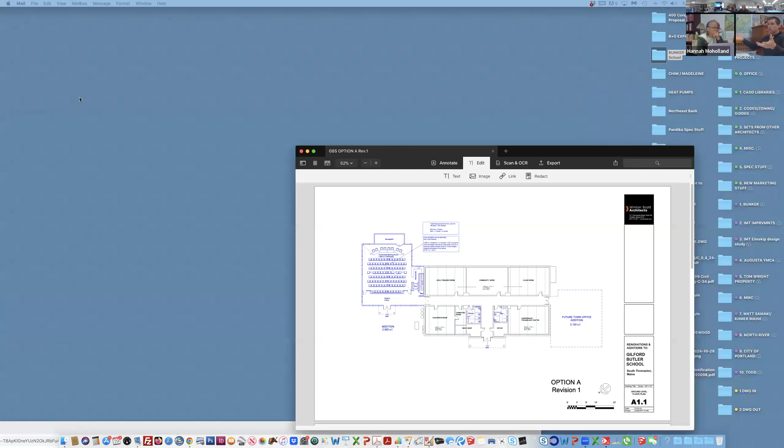Yeah, maybe if I could just frame it for us. So we, as a committee, our job is to try to figure out the best option and plan to move forward here. And then at some point we're gonna pull all our work together and take it public, not to sell it to people, but to show them, advocate for why we think it's the best line of thinking, build public support for it, and assuming that is successful we would then fundraise and try to pull it off. So we're at the beginning, not quite at the end of the beginning, and what this has really devolved into in the past 2 meetings is a choice between putting the addition on the left-hand side of the building or the right-hand side.

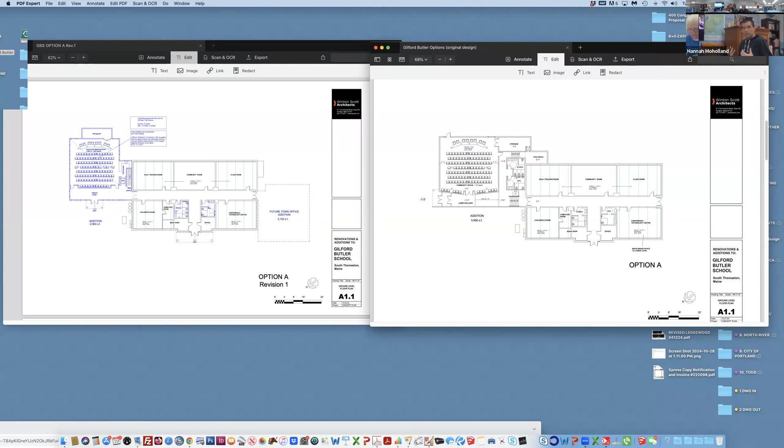And I think the 2 options are close enough that splitting hairs is probably not the right word, but it's viable on both ends. It comes down to one option maybe being a little less expensive, but not orders of magnitude less, and one option might be a little better for planning purposes and overall flow of the site, but not a lot better. So we have to come to some consensus on which one that's gonna be and why, and I think there's some things for us to talk about.

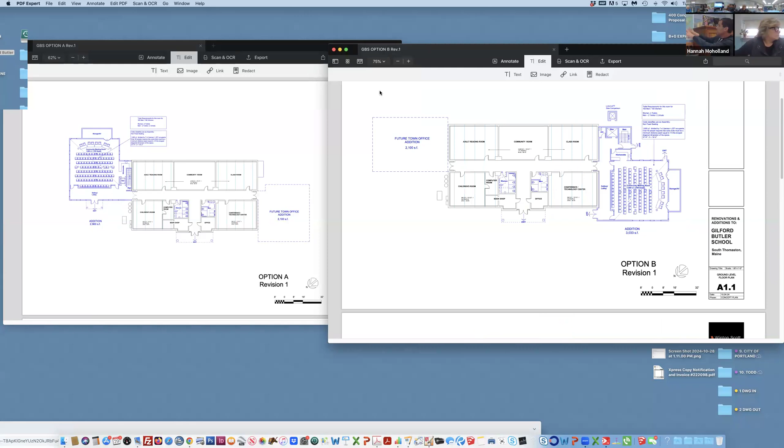So I think that's how to frame the discussion once we've let Steve present the options he's pulled together based on the feedback he received from the group at the last meeting. I think a good way to proceed would be to let him show us what he's done. And before we try to fix what he's done in committee, let's understand what he's done and make sure everyone has the same common understanding of the relative merits of what he's saying. Then let's talk about the 2 schemes and try to ascertain if we think we have enough information to really move forward on one or the other.

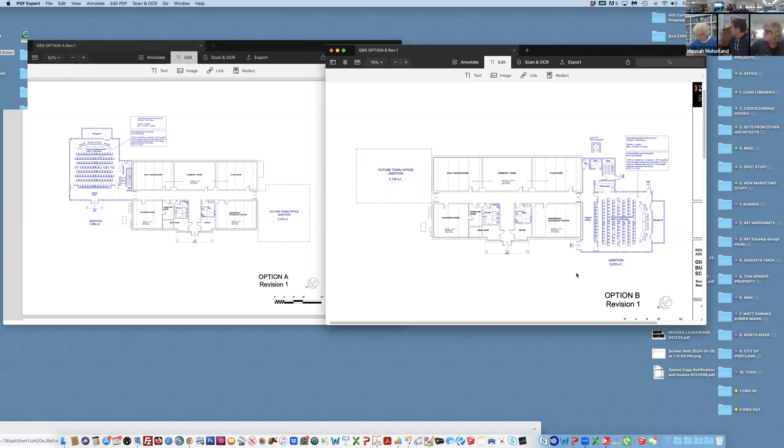We've had a little bit of engagement from our civil engineer, not really as much as I would like, but we've had a little bit. We're certainly gonna need more as we move forward, but we've primarily had Steve as a resource for now. So Steve, I guess at this point I'd like to turn it over to you and let you walk us through these changes.

Sure. Is everybody hearing me okay? Yes, okay, yeah.

So I guess just a couple of pre-comments to introduce the 2 options relative to the discussion from our last meeting. There were a couple things to point out. I think one of the things most everyone agreed on was that there was room to make both of the options more space efficient and kind of trim them down, relook at some of the circulation, and really try to simplify as much as possible to get that square footage of the additions down.

So a couple of big moves I made in this revision, to that end: the big one is in looking at the bathrooms for the new addition. We had a little bit of a discussion about the code requirements. When you have a big meeting room, you have to have a certain number of toilets to serve that, as well as the library. I had initially been showing the entire needed bathroom count in the new addition, and as we went through the meeting last time we said, if we open up the library, why can't we use the library bathrooms to augment the community room bathrooms to save some space? So that's what I started to look at.

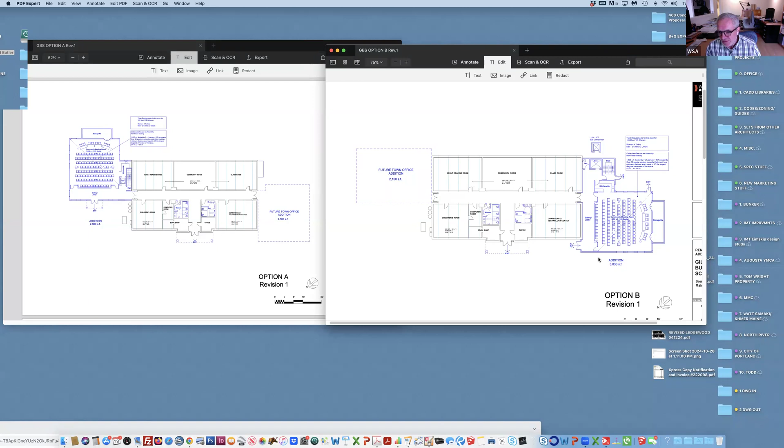One other thing I forgot to point out, in trying to reduce things, I did drop the seating size of both schemes in the meeting room. Originally I had 119 seats, so I took 10 seats out to bring it down to 109.

So that's that. Let me quickly run through the lower levels, which for now are pretty much the same in both options. In the schemes last time, I had not really addressed the existing big mechanical slash storage room, which I guess was the former fire barn. I'd heard that you still had some need for pretty significant big item storage, and the fact that it was down at a floor level sunk another 2 feet below the rest of the lower level creates another accessibility issue. I had kind of thought initially that maybe that just stays the way it is.

But I think I got pushed on that a little bit — John was saying last time that it's a very usable space with those big openings and potential for daylight access. So let's really look at what could be done there. In these new schemes, I do show that existing space being reused. I'm calling it an exercise studio, but it could be whatever.

Showing the necessary ramp, which would be a 24-foot long ramp plus a 5-foot landing on one side of the space to get you down into the building. And because of the way it's situated at one end of the building and its access to potential fire exits, this room would need 2 exits directly serving that room based on its size.

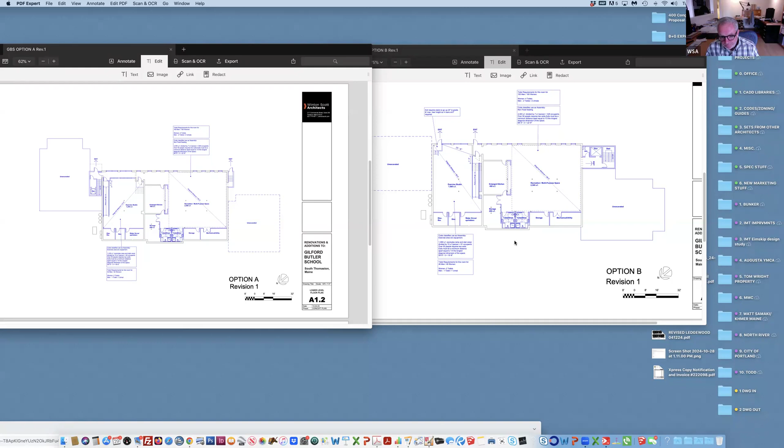So those are the buildings themselves, and I'll just touch quickly on the site plans for the two of them. I'm hoping this is big enough for people to see, but side by side.

Starting with option A now, because I made the mental leap of saying just go with an elevator, it's no longer situated halfway between the two floor levels. Instead, it's sited level with the main floor of the library. And what that means on that side of the site, with all the falling grade, is that you have to enter that addition on the front.

I have a little red—those red triangles represent the different entry points into the building. And it's going to probably require some retaining walls and grading issues there to get both regular access and accessible access, which would really have to come off the circular drive area, because that's kind of the plateau flat area of the site. Still allows for the lower entry into the lower level around back.

At this point, I basically made the parking of the two schemes the same. The idea is just as a planning exercise to say we might be able to improve on that a little bit here and there, or do it a little differently with Will's input, but basically it's 45 spaces comfortably on the site. And if you decide you only want to build 20 of those and have an overflow area that's gravel or grass, or decide to make that connection to sharing with the church, this should really just be seen as one option — if you were trying to max out parking, this is probably about as good as we're going to do and still have it be comfortable.

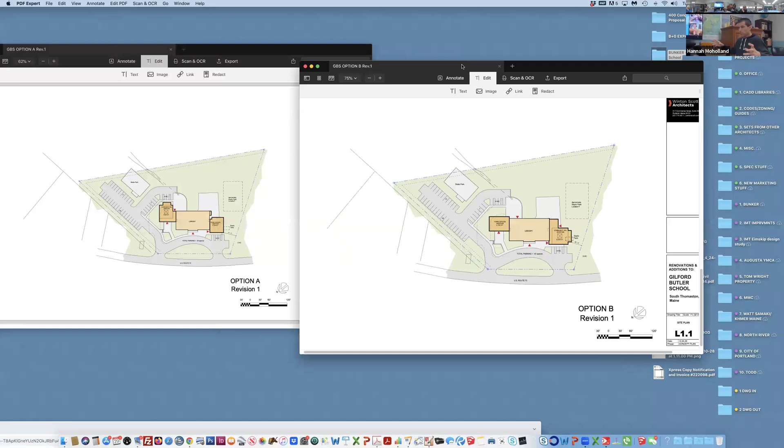Okay, thanks, Steve. I think what makes sense is for us to ask Steve any clarifying questions first about the schemes, and then get into discussing the merits and comments on them. One thing I'd like to reiterate from the beginning of the meeting regarding the town offices: I don't want us to get bogged down, because we're at the design phase where there are almost too many factors in play, and it can look like the mission is going in different directions. That's natural and okay.

But we also need to get back to our original charge. We had a clarifying email exchange with the town and John, who's here, about what exactly our mission should be with respect to the town offices. What we clarified and decided was that we weren't designing them now, weren't necessarily even planning for them now, but we were asked to consider what if someday the town offices might want to move there, and to try not to make a move here that would foreclose that. I think what I've gotten out of this discussion is that nothing we're considering forecloses that out.

It would just be tacking it on the other end anyway, most likely. So I think we can almost dispense with that part of it and not get too hung up on it. It's fair game for discussion and comment, but I don't think it's a driver of what we're supposed to be doing as a committee. So with that one caveat, I'd like to turn it over to the committee for clarifying questions to Steve, maybe first on Zoom and then here in person, and then we can go into a discussion.

Anything from Zoom for clarifying questions for Steve, from Michael, John, or Candace?

To me, it's very clear what he has explained, and thank you very much for taking the time to make it that easy to understand. I have a couple of questions that I think are off topic for that, so I will table my concerns until later. Thank you.

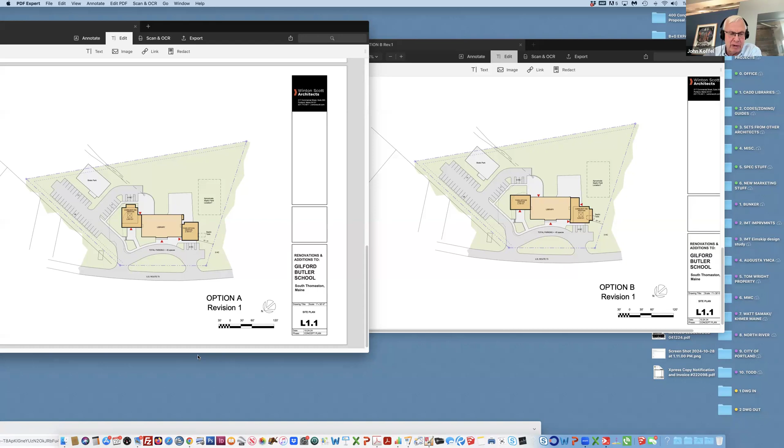Using the bathrooms was a brilliant idea. It saved a lot of space and kept everything on one floor. And I agree with Kevin that our mission is the community center. There are good options for the town offices.

I do think there is a cost factor for the addition in the A position related to its elevation. It's being set. Right now we're doing questions, and then we're going to talk about all that. It's a comment about the placement and its cost. John, we're trying to do questions now so we can all get to a common understanding, and then we're all going to comment on it after we ask the questions we need to ask.

My question then is, what is the cost difference between the two, A and B plans? Okay, thank you.

If you're looking for me to answer, I don't know. All I can say is I agree with you in the sense that, gut feeling, obviously the A positioning is going to be more involved with grade, but we're going to have to dive into it a little more, hopefully with Will's guidance, to get that dialed in more cost-wise.

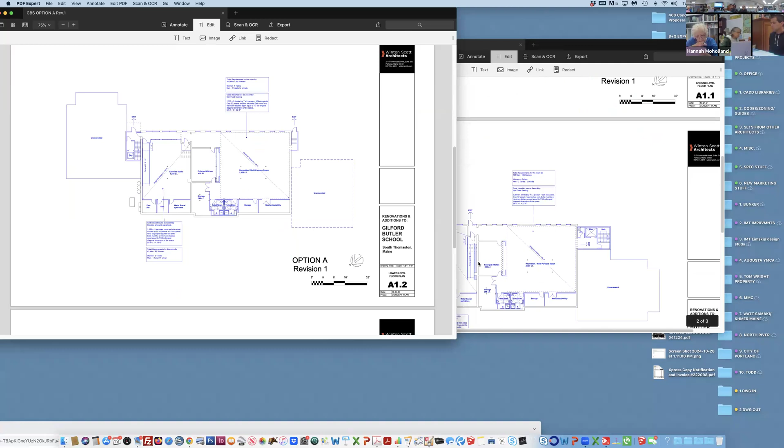But the idea was that it was all unexcavated. That said, there's probably an opportunity to capture that space if you wanted to, for utilitarian storage, but that is going to increase construction costs further to have more usable space. Any other questions? Well, I'm worried about the storage available in the building on the lower level. That's reduced significantly, so that's why I wanted to ask about option A.

Okay, but other clarifying questions? Could that addition on A be put on pilings of some sort, so it's more open, so that it could be used for storage? You can do anything with money. Well, that'd be more expensive to do it? Yes.

And so it's a question of—I think something like that is probably one of the second order questions, maybe not quite a first order question. It's important, but it's not as important as getting something that's feasible that we all have buy-in on.

Okay, my other question is, on option A or B, either one, the recreation room is 2,300 square feet, and our addition is 29—I don't have the other one right in front of me—just over 3,000. Could we somehow juggle the downstairs so that we have that same square footage without putting an addition on?

That's been an idea that crops up every once in a while. That's the cost-conscious, good old Maine thing to do. But my take on the whole thing is that it has never quite captured the energy of anyone, as if that's an okay place to have the town meeting, even if we can make it up to code, which has been some talk about.

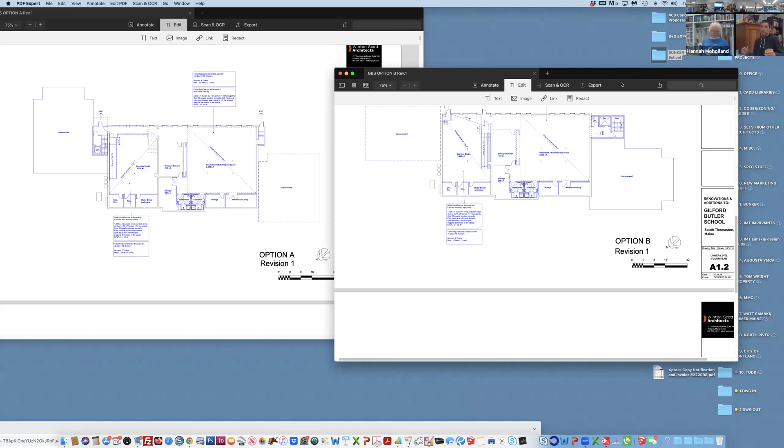I just haven't felt that there's been support for that being the cheapest way to get a town meeting on the site, of all the options we've talked about. I don't think anybody really likes it. Well, I don't know that I do either, but I'm just asking the question. Yeah, I mean, it's a good point, but it doesn't seem to have captured the imagination of the powers that be, and whoever they are. Right.

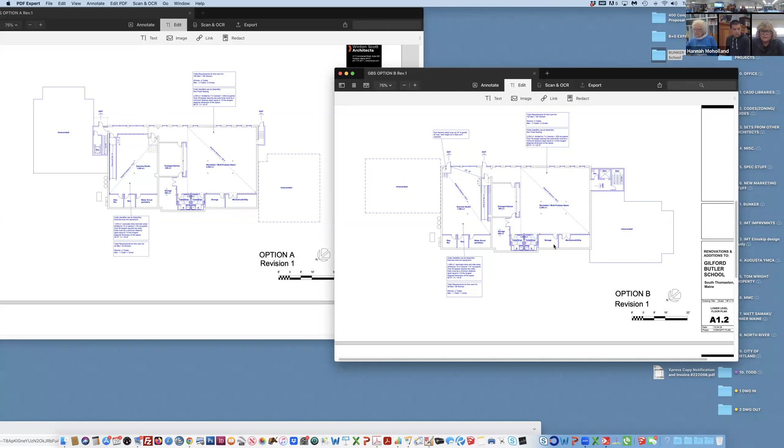I don't know if this is a question, but I think we seem to be straying away from the town's vote, which was to save the building. The addition is great, maybe down the road, but as of right now, we don't have any money.

Can we go in steps and stages to figure out what it's going to cost to save this building structurally? Part of it is, you're right, in terms of construction phasing and money raising, you're probably going in that direction. But in our design and decision process, we're coming to that solution a little bit backwards.

If you look at Steve's scope of services, it includes an evaluation of the existing building in terms of insulation, roof, mechanicals, and other things he's going to look at. We haven't even talked about that yet because we've been hung up on which end the addition might go on. Once we get that roughed out, the next thing will be, okay Steve, can you do that other stuff? Whether or not, and in what order, money is raised for which things is a whole different topic, but we're definitely going to look at the whole thing.

So we're looking at how long, a couple of years, three years? To do what? To do anything without raising the money. If we have to raise the money first, and if we go in stages, most places like to have their money up front.

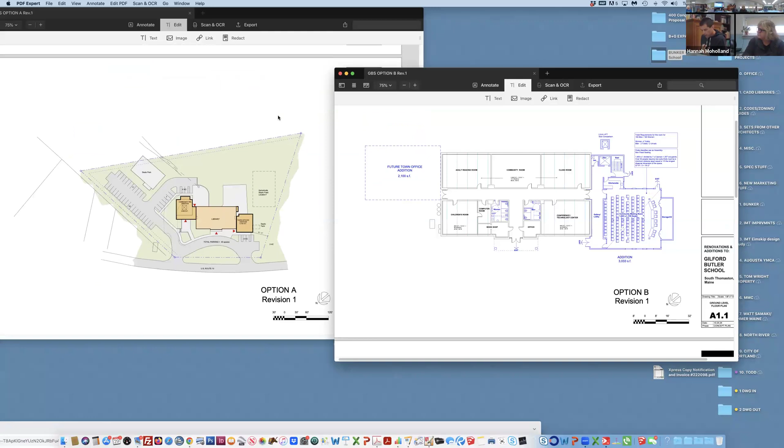I've got just one, Steve. On option A, I know there's a power pole out there and looks like a generator maybe, but is there any reason option A is set as far back as it is? Because the grade does fall away toward the rear of the site. If option A were pulled forward, I think a lot of the grade difference, or a good chunk of it, might go away. Do you have other constraints there, other than maybe the drive aisle, that cause you to push it so far back?

Yeah, I think you're absolutely right. The main reason I pushed it back was to avoid relocating the generator, the electrical service, the tanks, all that stuff there. It's not ideal to have it in the front of the building anyway, but I was trying to be cost conscious, and also trying to keep circulation simple. It seems like the new circulation wants to tie in as directly as possible to the existing corridor, so the meeting room has to go either on the back side of that or the front side.

It might be worth trying that, or even having a little jog to try to get the meeting room toward the front, to see if that would avoid some of that drop off.

I think for planning purposes, we kind of have what we need for the rough cut here. So I was just curious. Yeah.

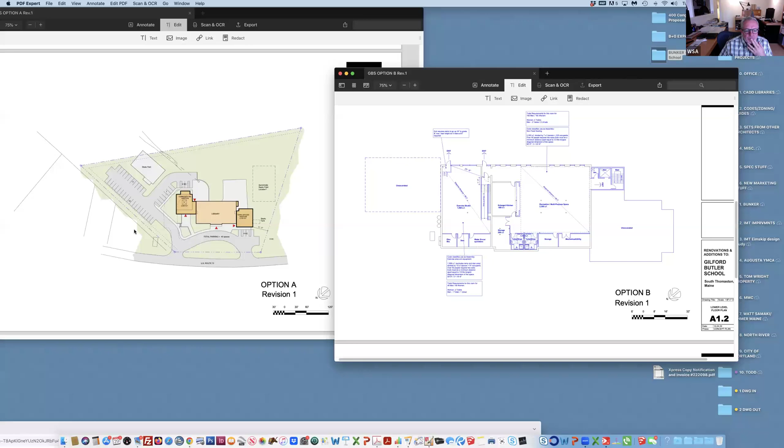Okay, if those are the questions, now I think it makes sense to start the part we've all been waiting for, which is the debate. Tear it apart.

So I don't know, would we like to start on Zoom again, or how would we like to do this? I'd like to hear a little bit from everyone, but I know there are some opinions out there. Candace, do you want to go first? Sure.

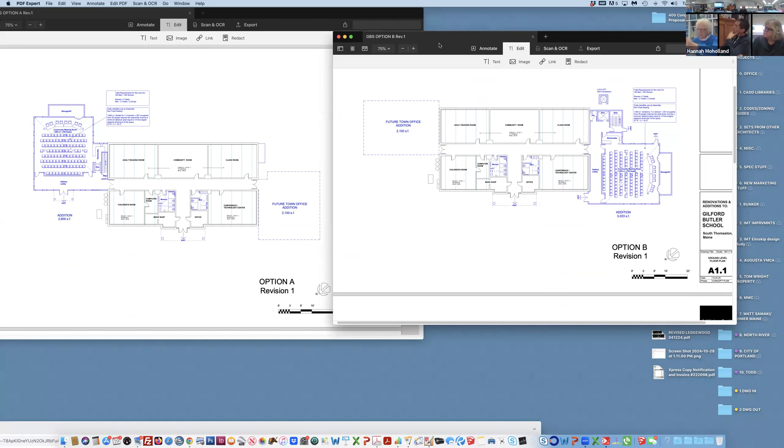I feel a bit remiss in the fact that for some reason or other, I did not realize that we were entertaining an addition to the existing building. I thought we were going to try to be as succinct as possible in using the building. So after your statement about people saying they were uncomfortable in the lower level with the meeting hall, I understand that now. So I guess that's the main thrust there. Is that correct?

Yes. Okay. And so then I'm going to move on to something else, and don't throw anything at me. I'm glad I'm over here. What if we considered having the addition where the meeting room was on level with the library, and then the underneath space would be made eventually into town hall space?

So, yeah, I can answer that pretty quickly, I think. One of the things that I wrote in my email, if you all saw it, was I did a little narrative on the existing basement, saying that when you have a space like that that's half embedded in the ground and you've only got natural light on one side, it's still quite workable and usable space for big, large things like a big multi-purpose room or a big exercise room or whatever. But to try to take space like that and turn it into something much more partitioned, like an office building that has individual offices and conference rooms and a reception area, when it gets that chopped up, those rooms that fall to one side are going to lose the natural light, and you're going to end up with rooms with no windows.

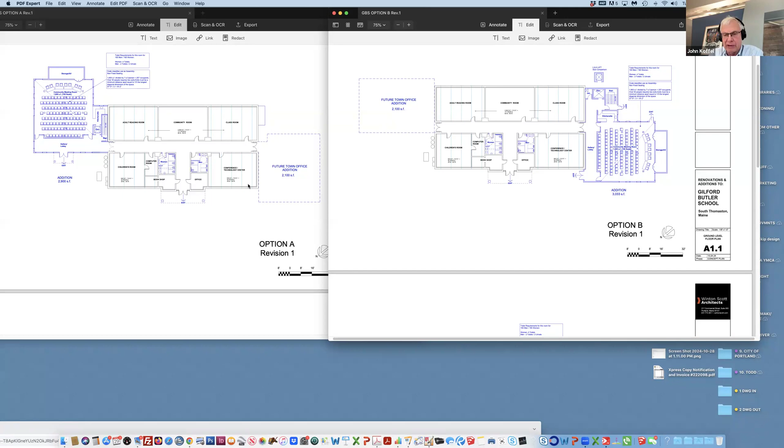In both of these schemes, the kitchen is in the basement, and without an elevator, that is an ADA violation as far as I can tell. You cannot be serving food in the community room without access. If we have budget constraints, we should go with option B, because it appears to have a lower cost, which could help cover the elevator cost and give us dual access to the kitchen. Otherwise, we're adding a kitchen to the meeting room addition.

Steve, do you think we need ADA to use the kitchen? Do we think we need ADA inside the building to use the kitchen legally? I'm not following that, because it's a logistics issue of being able to shuttle food up there, but I don't see why you need an accessible connection between the space you're serving and the kitchen, because the public isn't going to the kitchen—it's a work area.

A lot of helpful programs for disabled people involve food preparation and work in a kitchen, washing dishes, whatever—that's absolutely an ADA requirement. Access to the kitchen would be accessible because employees could go to the back entrance and work in the kitchen at the lower level. It's just that they can't deliver food up to the meeting room. But there's no actual program—we're not hiring handicapped people to run the kitchen. That doesn't exist.

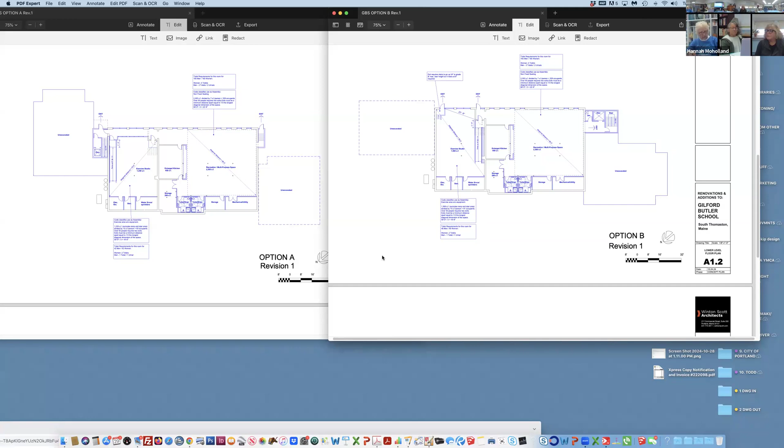I see that happening in the larger area. Yes, that was going to be my question. It would require quite a space for exercise, for 25 people, and that grows all the time.

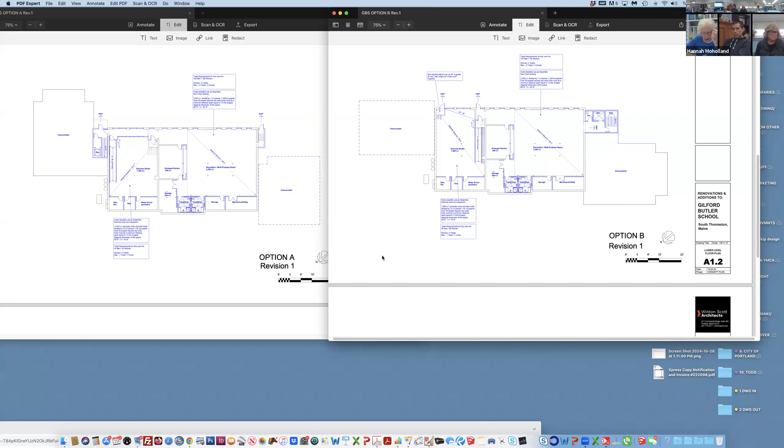And Steve had briefly mentioned that the exercise studio could possibly be divided. What does a typical exercise room in a public facility look like, how big is it usually?

It totally depends on your market and how many people you're trying to serve. You can have 7 treadmills or 2, equipment and all that. Which I don't think we're going to do — this is a small town, we're probably not going to have 7 treadmills, but no.

And that's on the bottom floor, right? You're talking about the studio, okay. So the bottom floor doesn't change in either option A or B, it's not really more. So what should we focus on to make a decision?

Well, to me, the things I've heard are that option B is probably a little less money, and option B leaves a little more flexibility to the far left space in terms of future options, because you're not tacking a building on the end of it.

Which is the point two people have made. Option A, I think, gives you a little bit better access to the parking lot. And it gives Penny better programming circulation, from the perspective of 'I'm the one who's going to be stuck running this thing' type of argument.

So those are the things that have risen up that are sort of irrefutable on each side, I think, that aren't a question of opinion. They seem to be fact for us.

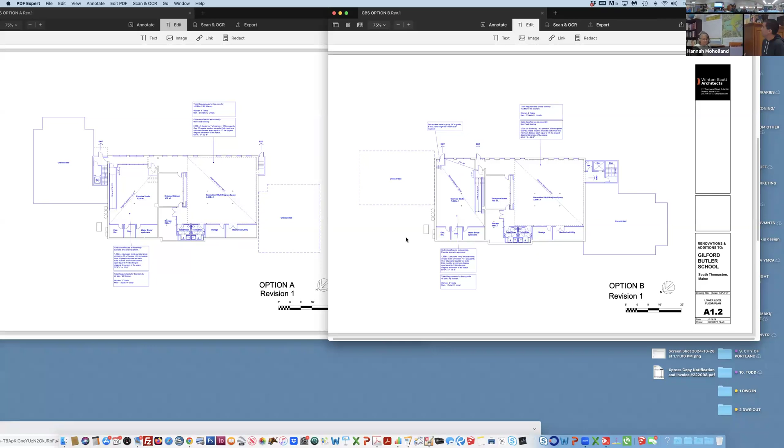Okay, so I'm going with A then. Oh, I changed my mind. Okay. I think we're making good progress because I think that's 2 A's and 2 B's, so. My report card is good, huh? John, go ahead.

What I'd like to comment is that we're focusing on the building, but we also need to focus on the building's relationship to the site, to the playground, to the children, to the exterior. Yes, we're designing a building, but it's in a setting. On that basis, I will say option B presents better potential for having windows and visibility to the playground, and even a patio in that alcove Steve has already designed. So you could have bigger walkout doors, overhead door, walking out to the playground.

So people had weddings, a memorial service, it was a good summer day. You can incorporate the outside more easily at that location. So that's my reason for voting for B, in addition to the fact that it's cheaper.

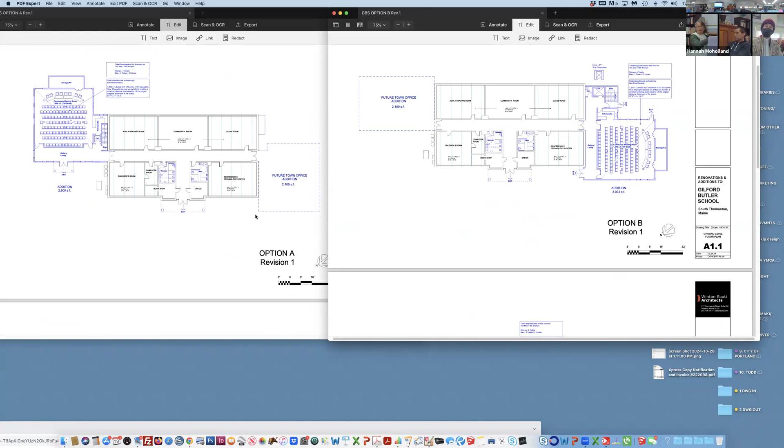I like it, that's where I am too. I'm intuitively, as I look at the site and break it down, I feel like it wants to be there. But I also, I'm not a resident, and I'm trying to facilitate rather than sort of drive it my way. So I'm trying to be persuadable and kind of go with what the group wants to do. All right, I'll go to A.

A woman has the right to change her mind. How many times? Follow the bouncing ball, right?

Maybe we should do a show of hands instead of- I'll leave that up to the chair. Just to hear, since we've been coming to the meetings, just to hear our viewpoint. Think it's fair to go. Sure, go ahead.

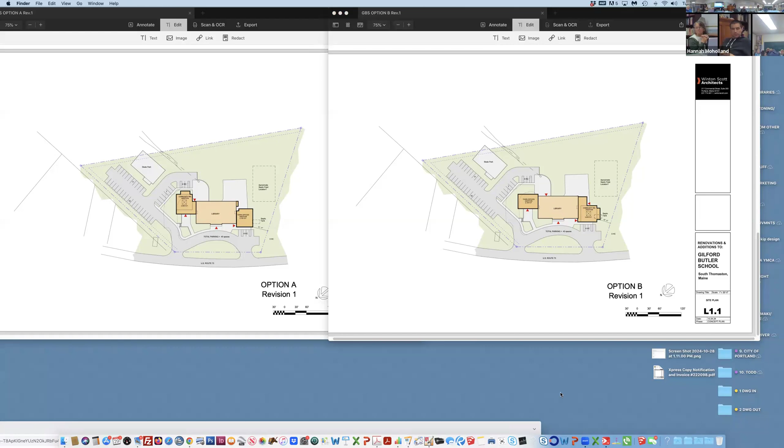Well, I like A because artistically the building would... I think somebody mentioned in the last meeting it could be a sausage. If you just add it on to the right-hand side, it just becomes a long building. I think just putting the other room off to the right makes it a nice building and surroundings.

The other thing I'm interested in, and hasn't been mentioned, is light into whichever addition you go with, A or B. And I haven't heard anything about that.

My suggestion for the storage is just make the whole basement storage and be done with it, and make sure that Penny has everything she needs down there. But then you're talking about creating a full kitchen. I guess the question is, how big of a kitchen do you need? That's a big kitchen down there, but I like the idea that you have a flow from the addition, the meeting room that can be other things, onto the same area as the center here.

And I understand there's expense with excavation, but when you visually look at the building, A is much nicer.

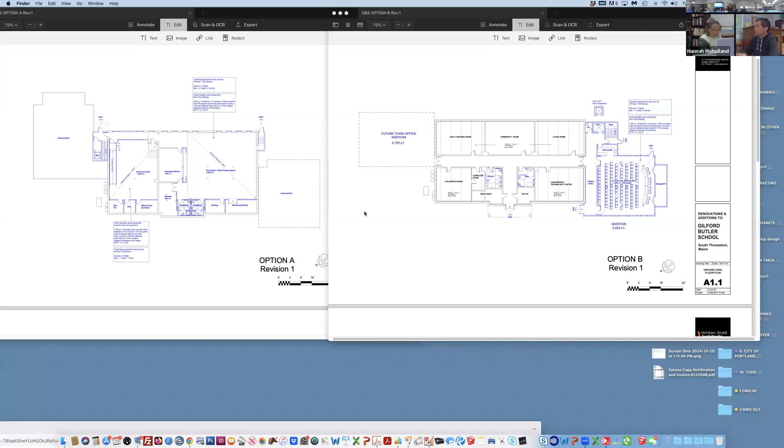The one thing you have been stressing all along is that we do look to being an emergency overnight shelter, which does require the commercial kitchen and showers and bathrooms, and I don't see that happening anywhere but on the lower level.

So since we've opened up the floor to the public, before we engage point by point, let's hear from this guy.

I really haven't had a chance to study them and I can't see it very well up there. Is there a handout? You have mine. Can I just look at one for a minute? Sandy, you can go ahead.

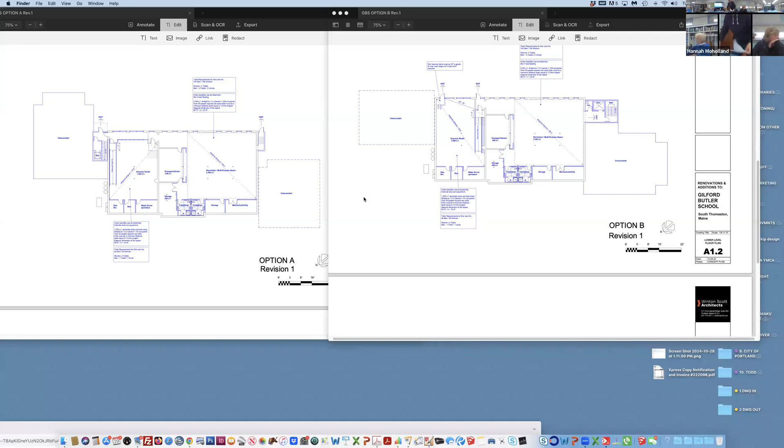I'll be short. I prefer A, for most of the reasons you say - the center in terms of its location near the current library, and accessibility, also accessibility to the kitchen, should there be some kind of event that would require food.

And I know an elevator is expensive, but I think it would be the best thing to do for this building when you're having two levels. I think it was John Coffey last meeting who said trying to integrate the building as much as possible on two levels, which is what we struggled with too in our community. So I think an elevator might not really be a necessity, but something of an investment for people being able to use the whole building. But other than that, I think A is a better choice.

Okay, thank you, Sandy. Sally? The only thing I wanted to comment on was that if you continue to insist on using the lower level, you should at least put the shaft in for the elevator.

Yeah, we said that. We talked about that preference. Yeah, we said that. Which side of the building would the multi-purpose room be on? I like A to look at, B looks...

My building experience is the nearer a square you are, the cheaper it is to do. Right. But it's not necessarily the most aesthetic.

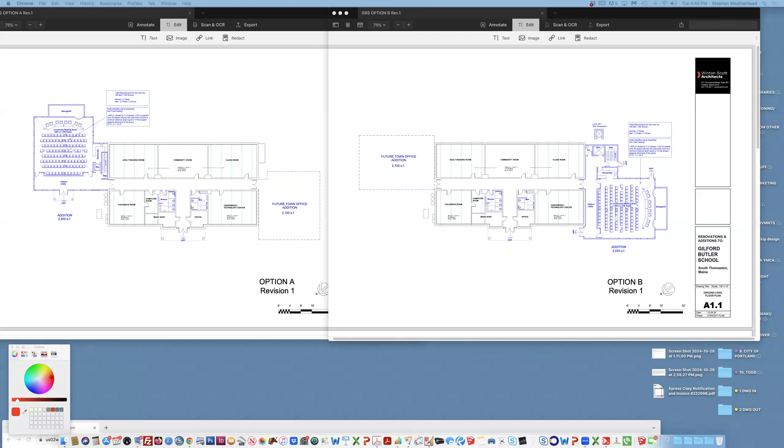This started 5 years ago in 2019 with replacing the current building with a 4,600 square foot building for $1.4 million. In 2022, it went to a 6,600 square foot building at 3.6 million. It's now in 2024, a 12,800 square foot building plus either 2,100 or 3,000 square feet. We're into 15,000 square feet for a town of 1,600 people.

We're probably at, I mean, renovate the building, sure, maybe $1 million, maybe more. Build the addition, we're looking at, again, $2 or $3 million. We're looking at a $4 or $5 million project, and we're not being realistic.

And what we're doing, I'm glad I think it shows option B, because you've got structural requirements to put a meeting room above grade with footings. You can pour a slab and have the meeting room in option B, so it's a lot less expensive. I think $250,000 is probably what it is. There's no structural steel that's needed, there's no foundation that's needed.

I just think that we need to get back to why. One of the reasons I think the town voted to renovate the building is because people don't want to pay $4,800 each for the 1,600 people to pay $3.6 million when everybody's on marginal incomes. So I think it's wonderful that we've gone down the road we have.

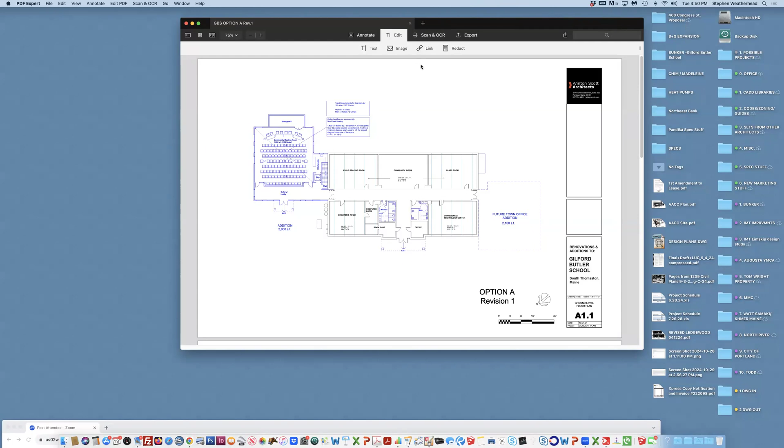Oh, phase two. Yeah, I think that our charge as a committee was to figure out how to best save the building and build a new addition. Okay, I didn't follow that as the full... I think we agreed we would look at it, and I think it's a good idea. But we've gotta...

I'm not afraid to speak about the politics, because I don't live here and I don't care. But I think that the grand bargain that allows us to all be at the table here and be relatively civil with each other is the idea that everybody's kind of getting something that they want.

Oh, absolutely. But I mean, it's gonna take a couple of years to raise the money anyway. So if you renovate with whatever you raise first, and you keep raising the money, then right after the renovation, the addition could be put on.

It gives more time to generate money either from taxes or from fundraising. So I'm a proponent of an addition. Let's go back to the addition.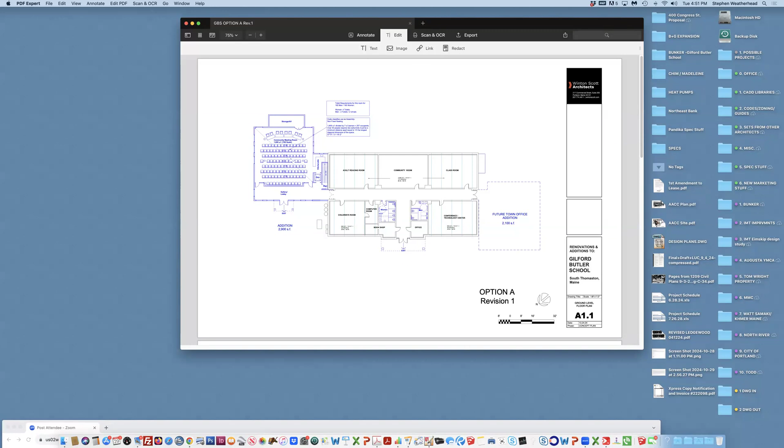We're looking at 2,100 for the town offices. You're looking for 30 something, I can't read it. They spent 2 years on the previous committee coming up with a 35 by 51 foot room. Why are we going over 1,950 square feet?

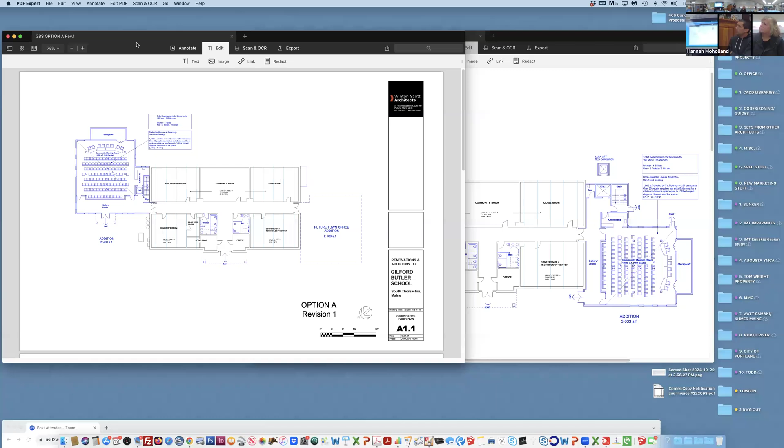Well, I think we still have to optimize what we propose would be being built. But right now we're going to be in an infinite feedback loop of meetings if we don't decide A or B. So I think that's what we're trying to do today.

We were starting to get to a consensus, then we opened it up to the public, and now I'm trying to bring it back to the committee, which has taken about 5 minutes. Okay, go ahead. No, I'm good with it. I expressed that, but I will give a write-up.

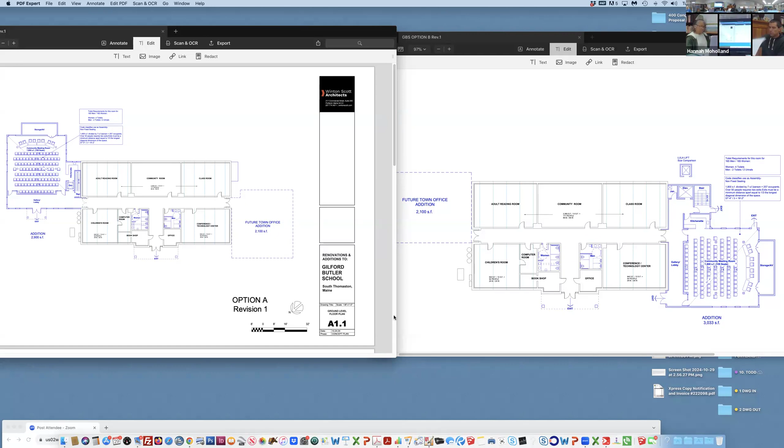So what we're trying to do, I think before we were starting to lean towards some consensus around B, and could that work if we did certain things. Then we had sort of a shift within the committee toward A, which sort of got piled on by the public who kind of also liked A. But I think as a committee we need to bring it back in, and I'd like to go around one more time. John, I assume you're still a proponent of B.

I haven't heard that change. I'm a proponent of B for simplicity, for access to the outdoors, and for cost. Okay, and Penny, are you still a proponent of A? A would be my preference.

Candace, you want us to come back to you? Yes, please. Okay, anyone else - you still would be?

B. Final? My answer, final. Sure you don't want to phone a friend? That's an idea. Okay, all right, how about over here? A. A. Okay Michael, my preference is still B.

Candace, B. Kevin? That's 5 for B. I'm fine with that. I'm sort of on the A.

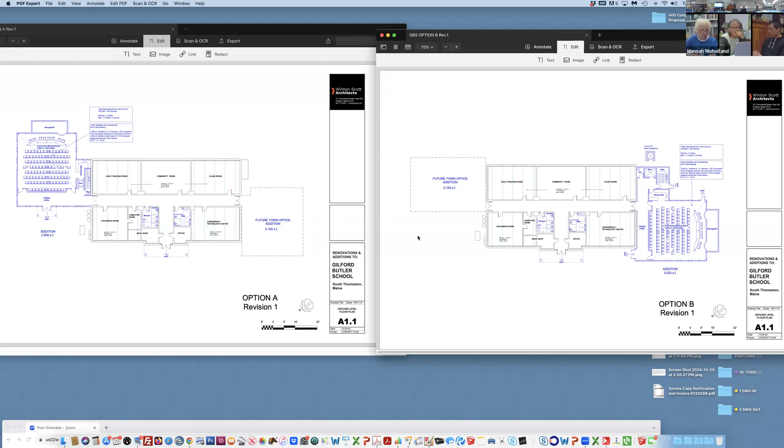So our next meeting, maybe a month from now, if that works for folks. Anyone looking at a calendar? Do you want to go before Thanksgiving or after? Thanksgiving's late, the 28th, so before. It's just a month out. I would love to sneak it in before, but I defer to the architect on what makes sense. Do you want to do the 19th? If we're doing Tuesdays, that would be the 26th. People travel though, that's why I was choosing the week before - it'll probably conflict with a select board meeting too. Do you want to push it to the first week of December then? What's December, Tuesday the 3rd? December 3rd is a Tuesday.

Oh wait, today's Tuesday, so yeah, we've been doing Tuesdays. Does that work generally for folks? If there's a selectmen's meeting, no - well, there's not. If they're meeting the 26th, then they won't be meeting the 3rd. I think we generally meet the second and fourth Tuesday. I thought someone mentioned the 26th. But if we take the 3rd, you guys can work around us, and the issue is Zoom - actually you want it, your meeting doesn't start for an hour. On the 26th I'm going to be in the deserts in Utah, so I'll have questionable service. And I assume 3 o'clock again works, kind of like the 3 o'clock for Steve too. Great, excellent. So even if there is a select board meeting, we'll be out of here. All right, so December 3rd at 3 on Tuesday.